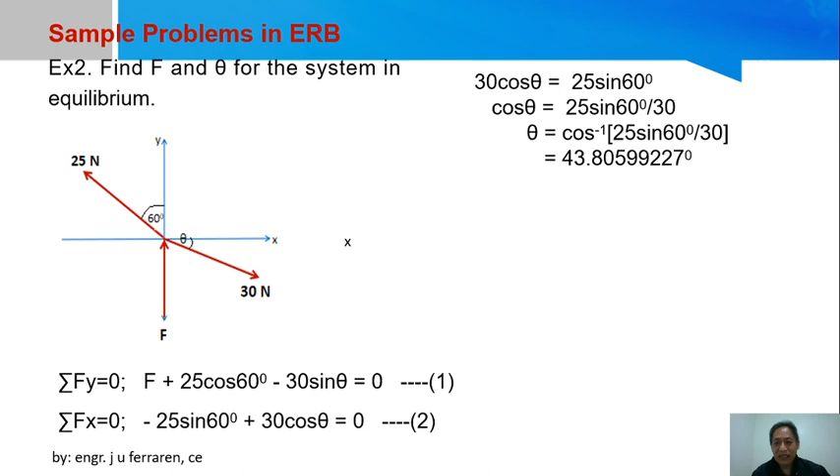In my first equation, both the required are present. But in the second equation, only one of the unknowns is present. So if I consider equation 2, I can arrive at the value of the angle. So we have the equation simplified, and there I arrive at the value of the angle theta. In equation 1, if I substitute the value of the angle obtained, then my value of F is also obtained. So, in summary, I have a value of F equal to 8.27 Newton, and the angle is equal to 43.81.

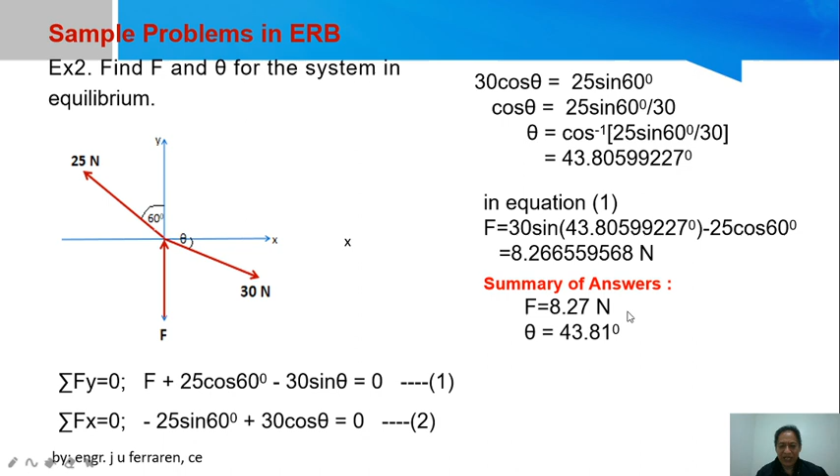So, in the final answer, it is here where we have to round up. Never round up the values in between because it may affect the accuracy of the next quantity, like F. If that is rounded up and carried here, there may be a possibility that your answer may be far from the accurate value. Okay, so that's how to solve it. Very simple. Okay, next problem.

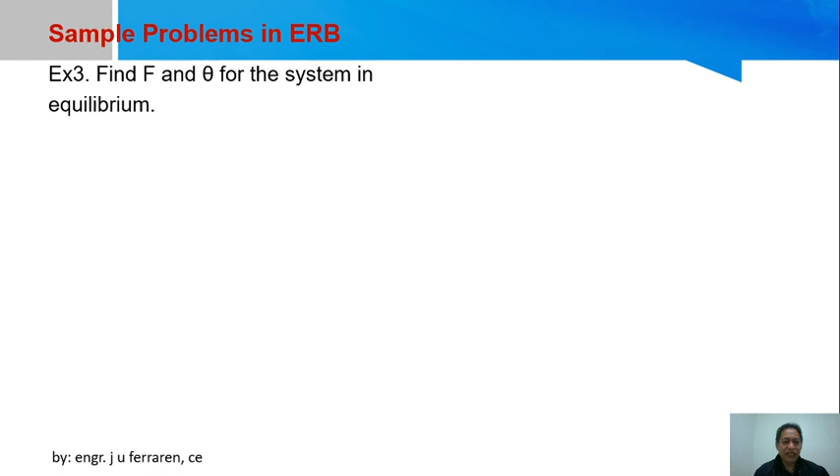Again, you are required to give the magnitude of a force and the value of the angle of the same force F. Earlier, it was different; the angle belonged to another force. Here, it is the force and its angle from the y-axis that is being required. Okay, so we go with the component method.

So, I can take summation of forces along x. So, what are these forces? It has a component going left. So, we have negative, opposite to theta, F sine theta, then plus. This one, 95, going right because that is summation of forces along x. Earlier it was opposite, that is why I was using the sine function. Here, cosine of 45 for your 95. To the right, it's plus, then minus 60 cosine of 75, going left, that's why we have negative.

So, we have the product of F and sine theta as if this term is placed on one side and these two terms are combined, giving you a sum which is 51.646. Now, F sine theta is actually the horizontal component, the same as F of x. So, that is the component of your F. Anyway, we have the unknowns, the angle and the force, and that is your equation number 1.

By taking summation of forces horizontal, I can also go with the summation of forces vertical. Unknown force negative, that's downward, adjacent to theta, so we have F cosine theta. Then minus 95, down also, so sine of 45.

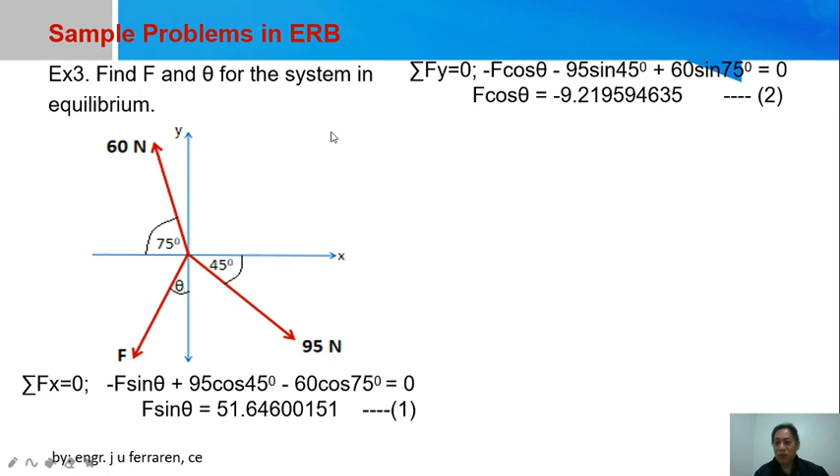Then my 60, that is going upward, opposite to the given angle, so we have sine of 75 equal to 0. Now, if these two are combined, and we bring the term there to make it a positive term, this is now the resulting simplified form. So, F cosine theta minus 9.21 something as the value of your constant.

So, if you have equation 2, I can also recall my equation 1 and consider what you are going to do to arrive at any of the unknowns. Now, I can easily eliminate my f if I divide equation 2 by equation 1. But dividing equation 2 by 1, while I can eliminate my f, there is a ratio of cosine and sine. And in trigonometry, what is cosine over sine? It is cotangent. And if that is cotangent, we have no direct function from the calculator that can be used.

So instead, I may choose to divide equation 1 by equation 2 because the ratio formed is sine over cosine, and as a result, this will give you a tangent function. So while I can eliminate my f, I can have my tangent function equivalent to the ratio under the quotient identity. Now dividing these two will give a negative quotient. So if you solve for the angle, there's also a negative value of the angle. Carry that value into your equation 1 or 2, then you arrive at your f.

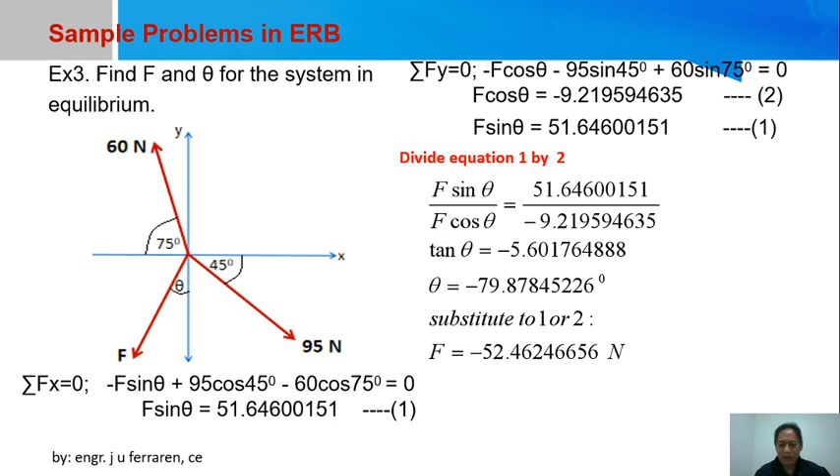Now, what is the significance of this result? If I consider the plotting, while I have the value, it is true, we have theta and f, which is equal to this. The negative value of the angle and the negative value of your force have significance to your result when you plot. If I start with the angle, negative 79.878, it would mean that the angle is not directed in that direction. It is not formed by clockwise rotation. Rather, it is in the opposite direction from the y-axis, because in our figure, y is used as a reference. So, it is 79 going there.

Your force can be found here, but the force cannot be directed along the line of action in the fourth quadrant because your f is also negative. So if that's the case, along this line of action, your f can be found in the opposite quadrant, which is quadrant 2. So as an effect, this is your figure.

So this is the negative 79 because the direction must be opposite. Instead of going clockwise, it should be counterclockwise. Approximately, this is the negative 79. Your f would be acting here if your f were positive. But it is also negative, so you have to consider the opposite sense, or opposite direction, which is going left. So your f is directed there.

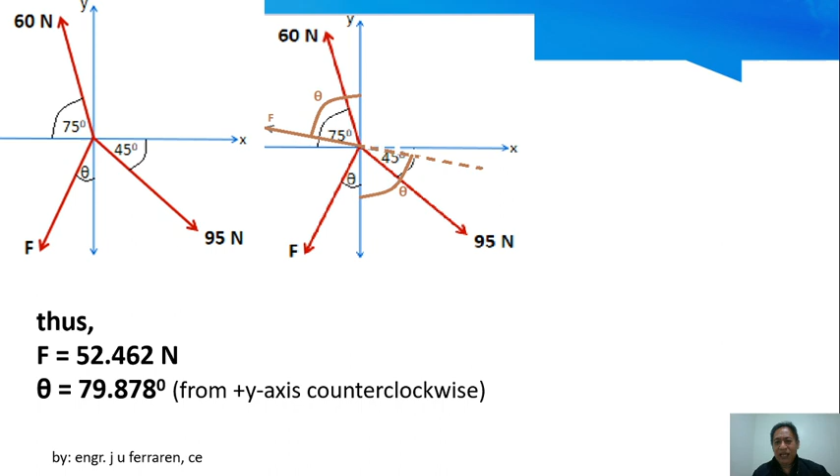Okay, so your angle is theta, and its value is equal to 79.878. So the true value is this one, and your f is actually directed there. Now, since the unknowns belong to the same force, a calculator can really be used to solve for the answer. Recall that in the equilibrium condition, the resultant must be zero. The resultant is equal to the summation of the force vectors involved in the system. So, using my calculator, I can have this as my resultant.

So, this is supposed to be our angle theta. So, this is 0. And from the component, we have 60. Where is the 60? This one. What's the angle if that is 75 here? It should be an angle in standard position, so it should be the difference of 180 and 75. That is why I have 105 degrees. Then, plus 95. The angle is 45, but it is clockwise, so it is negative 45. Now, if I have f and theta, f is the magnitude, and theta is supposed to be an angle in standard position.

But in this case, theta, you can see it there. But according to the interpretation of this equation, F is the magnitude, theta is its angle in standard position. When that is simplified, your F can be placed at the left. Your F is negative, and there is an angle which can be produced by taking the summation of your force and its corresponding direction.

So when it is placed in the calculator and you press equals, then you will arrive with a rectangular form wherein these are the components. If you check this one, this is your F of x, this is your F of y. So in polar form, the magnitude of the force is 52.462, and the angle is negative, this one.

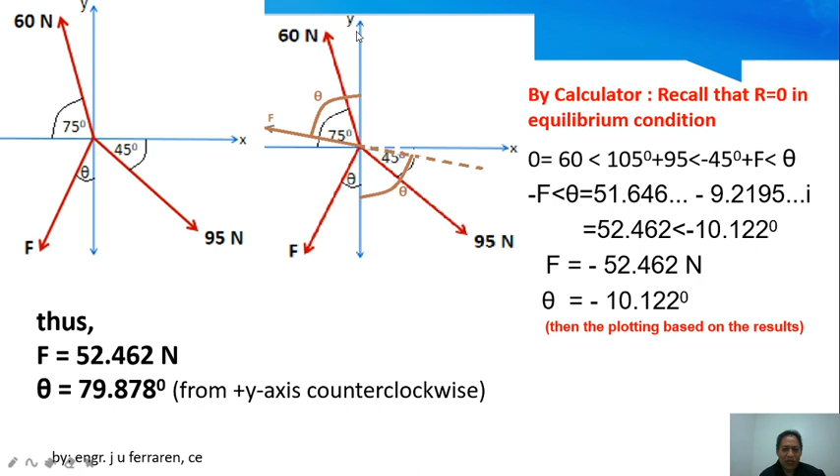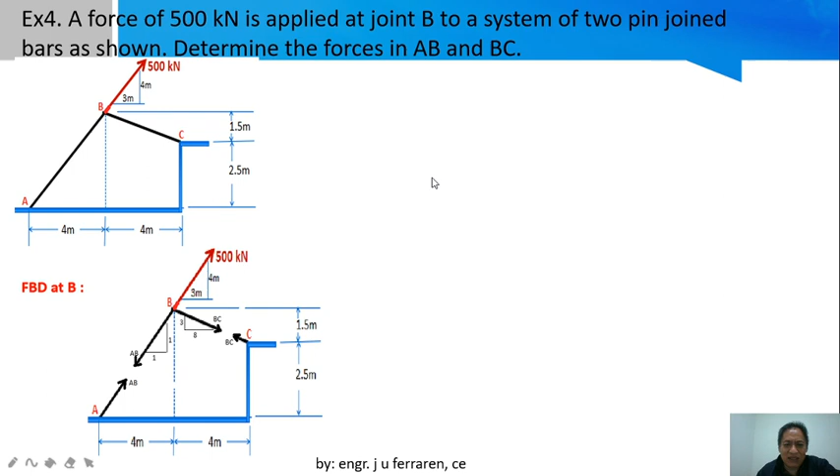Because this is 3 halves over 4. Can you imagine what I'm writing here? 3 halves over 4. To remove your LCD 2, you multiply both by 2. So the 2 is out in the numerator, giving you 3 left in the numerator, and you simply double your denominator. That makes it equal to 8. So it's 3 over 8.

Okay? Now, summation of forces along X. So we have AB, and in our figure it goes left, correct? So minus. If I have 1 and 1, the hypotenuse of that would be what? Square root of 2, from 1 squared plus 1 squared. That is why I have 1 over square root of 2. BC goes to the right, right? So BC times 8, over square root of 73.

Then, to the right is 500. The horizontal component of that is 3. The hypotenuse, when you have 3 and 4, this is a special triangle, it should be 5. Or you can verify that using the Pythagorean theorem. But it's good for you to recall that because those are very common dimensions of a right triangle.

That is a special triangle which can even be used for layouting. Certainly, the intersection of 4 and 3 would always be at 90 degrees.

Simplifying and bringing my constant to the right, it is now becoming opposite or negative. From positive, it becomes negative. I call this equation 1.

I can proceed with equation 2 from the summation of forces along Y. Along Y, AB is downward, so it is negative. Horizontal vertical side is 1 over the hypotenuse square root of 2. BC downward, so along the vertical, 3 over the square root of 73. Then plus 500 times 4 over 5 equal to 0. Bringing the term there, so we have minus.

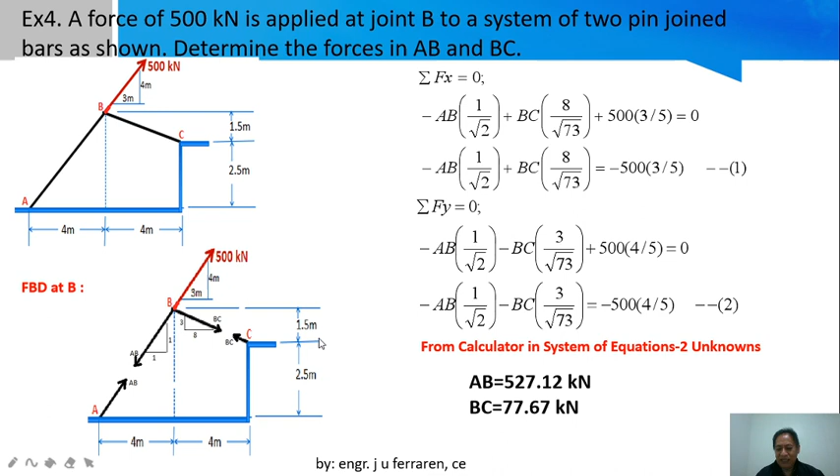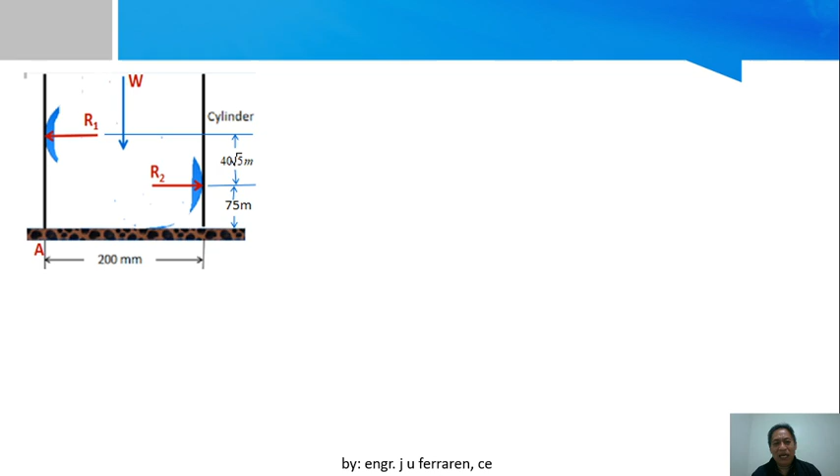So continue, I have to consider the free body diagram of my cylinder. Due to the effect of the load inside my cylinder, there is a possibility of the cylinder being overturned. So I have the FBD of my cylinder.

R1 is coming from the smaller sphere. There is no other reaction when it is frictionless, so that surface is smooth. So only normal reaction, perpendicular to the surface of contact. That is the only reaction due to the smaller sphere, the 200 Newton sphere.

Since it's at the point of contact, that's where the reaction is directed. I may call this R1, and this R2. The sphere is resting here, so there is a reaction there. But that reaction is on the floor, on the horizontal surface, not part of the wall and not part of the cylinder, because the cylinder is just resting on the horizontal plane since this is open. So there is a reaction supposed to be here, but it's not part of the cylinder, not included. So we have R1 and R2.

I have to solve for my R1 and maybe my R2. To get R1, these are the only forces involved.

This will cause overturning. This force will balance with the overturning effect. If these forces are excessive, then it will really overturn in that manner. So our W is the one which will put the cylinder into an upright position.

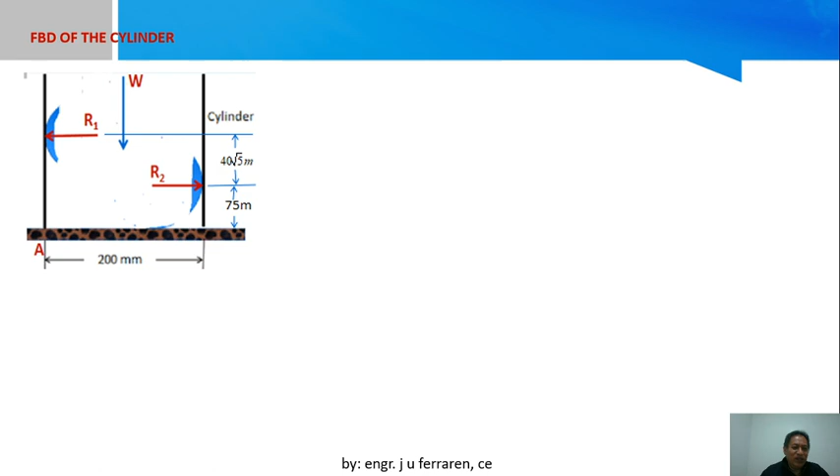So I have to solve for R1. What do you think is the best approach to find R1? R1 is due to the smaller sphere, so I can go with the free body diagram of the 200 Newton sphere to solve for R1.

So now, for the smaller sphere, I can put the load, the weight. Then this is the reaction. If the reaction is going to the left, directed to the cylinder, then the reaction to the cylinder can now be opposite, so it should be going right. For every action, there is always an equal and opposite reaction, as we learned previously. So R1 is directed here.

Now, this force is actually coming from where? It is coming from the lower sphere. So there is a reaction in that direction, from the lower sphere, or the 500 Newton sphere. It will be directed toward the center of the sphere.

So with this, I can now form my own equation of equilibrium. I'm interested in R1, but I cannot go with R1 without knowing R3. So I can start with R3 by taking the summation of forces vertical. I assign an angle of theta.

So R3 cosine theta, then this is the component - horizontal component, vertical component, so adjacent to theta. That's why it is cosine theta positive, because it is upward, minus 200 equal to 0.

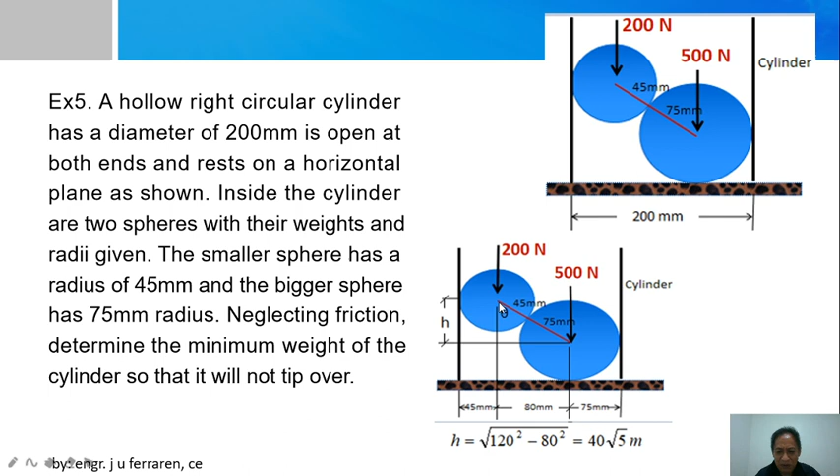My cosine theta, if you look here, is the adjacent side over the hypotenuse. The adjacent side is h, and the hypotenuse is 120. So I can have the cosine theta with the adjacent side being 40 square root of 5 as solved from h, and the hypotenuse being 120. Simplifying this, we have square root of 5 over 3, because that is reducible by 40.

Now going back here, R3, the value of cosine theta is substituted, which has a value of square root of 5 over 3, and that ratio can be substituted here. That is entirely cosine theta, then 200. Okay, then you can have R3, that's 600 over square root of 5 Newton for R3.

Now you can go to your R1. How? Take the summation of forces horizontal knowing your R3.

So, you can have R1 minus R3. The opposite is the component, horizontal, opposite to the angle. So sine of theta. Now, what is sine of theta from the figure? Can you recall? I won't go back to that.

So the vertical is 40 square root of 5. Horizontal is 80 mm, this is 120. My theta is here, so if that's sine theta, that is 80 over 120. But this can be reduced by 40, that's why we have 2/3.

So R1 minus R3. And R3 is known to be square root 600 over square root of 5. Then the value of sine theta is placed here. So R1 has a value of 400 over square root of 5 Newton.

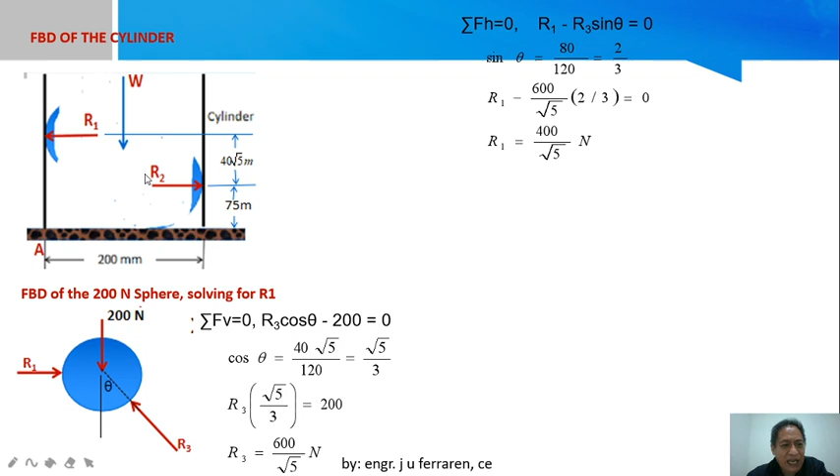If you look at the diagram, there is no other forces acting horizontally except for R1 and R2. So if that is R1 and R2 acting here in your cylinder horizontally, that means these two forces in equilibrium will be balanced. So we got summation of forces horizontal, which shows that your R1 is just equal to R2, and the value of your R1 is the same.

So the two forces, equal in magnitude, opposite in direction, having a perpendicular distance between them, are actually forming a couple. So it has a couple arm which is your H, and there is a moment of a couple right here.

So if I'm going to continue with the solution, taking moment at A: W, 100, acting at the centroid, half of 200. What is the moment produced? That is a clockwise moment, while the other force R2 is still clockwise in that direction with a distance of 75. R1 is different.

That is the one which is counterclockwise. So R1, what is the moment arm from A? If that is 40 square root of 5, there is still 75. So you can have 75 plus H. This is H.

Now I tried to simplify by bringing the term there. So I write this as my first term being the positive term, then minus R2 times 75. Then I take the value of my R1 and my R2 having the same value, so I substituted them: 400 over square root of 5, so I have 75 plus...

Okay, then we have the same. I distribute the factor 400 over square root of 5. Then when that is distributed, we have the first term and the second term. But you notice these two terms are actually opposite, so this can be removed. The expression that is left is this one.